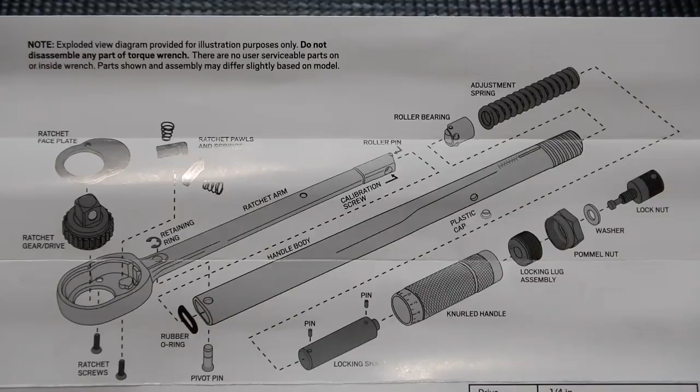This just shows the parts breakdown, how the unit is made for the large torque wrench. Now, these have no user serviceable parts, but this just shows how it's made, and I thought I would give that.

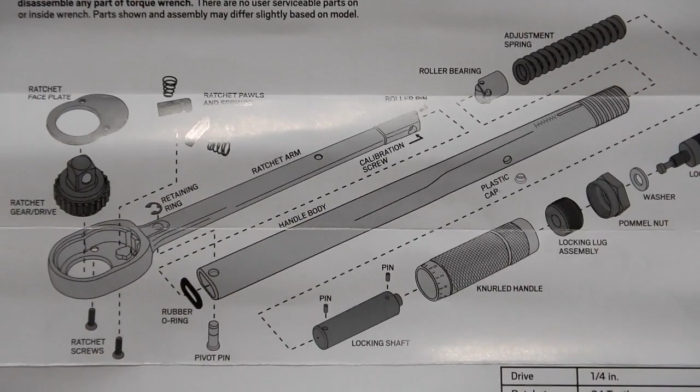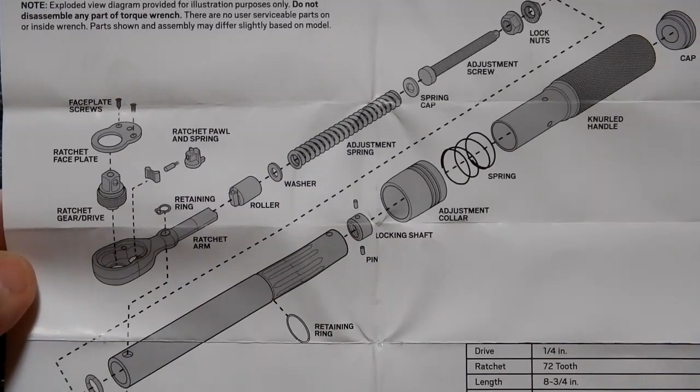And likewise, this is the smallest torque wrench.

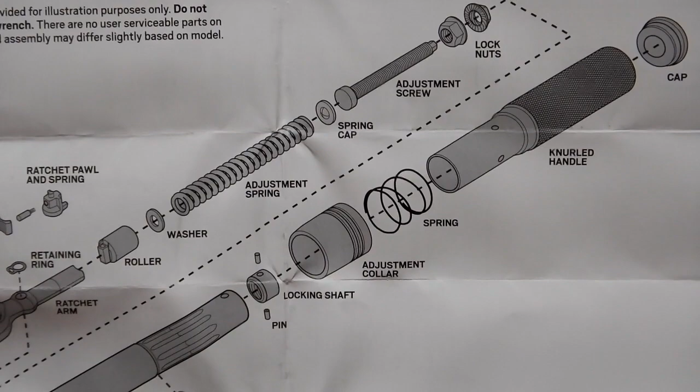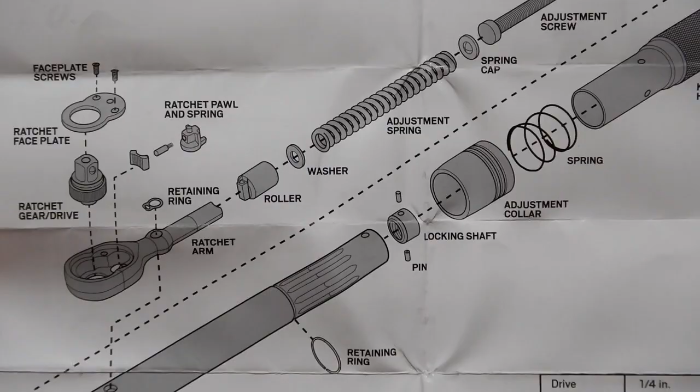With the tool, you do get this little tag that's attached to the square drive end. Thought I'd go over it real quick. Obviously, it is a precision tool. You never want to use one to break loose fasteners. I always use a separate wrench for that. These are strictly to just torque down to spec a bolt or nut.

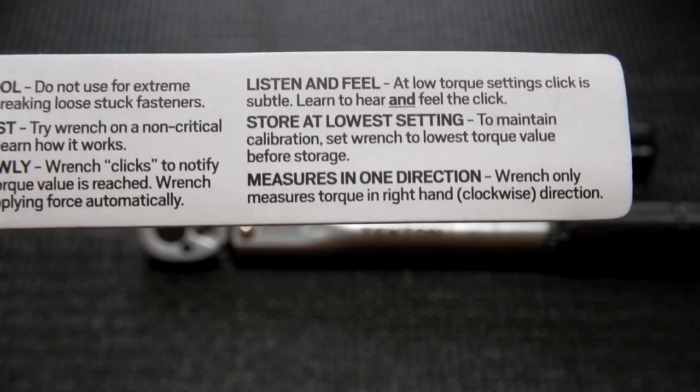And this says measures in one direction. Wrench only measures torque in right hand clockwise direction, which is true except for this, as I stated earlier, the smallest one will do clockwise or counterclockwise.

And again, if you're going to do a left-handed fastener with the small one that does go in the counterclockwise direction, if you've got to break it free for some reason, again, going in the clockwise direction, just use a separate wrench. Always use a torque wrench for tightening only. They're not breaker bars.

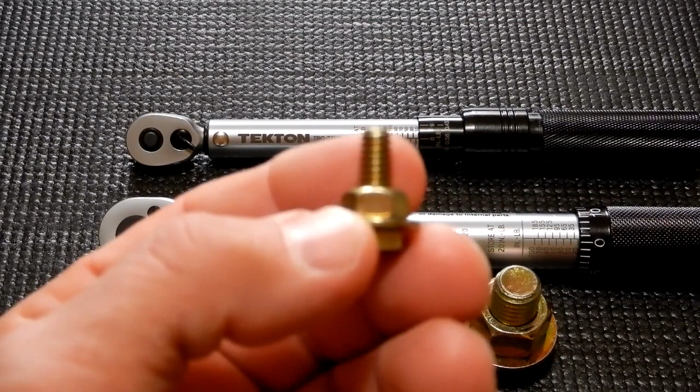Now, I stated that I have a little process that I use prior to actually torquing the bolt or nut that needs it. What I'll do, depending on the torque wrench and the size of the ultimate bolt or nut that I'm going to be using, I have these grade 8 bolts here. Like in this case with the 1/4 inch, when I do the demonstration, if I was going to use this on an engine or anything that had to be torqued, what I would do is I would put this in a vise. I'd put the head of the bolt in a vise.

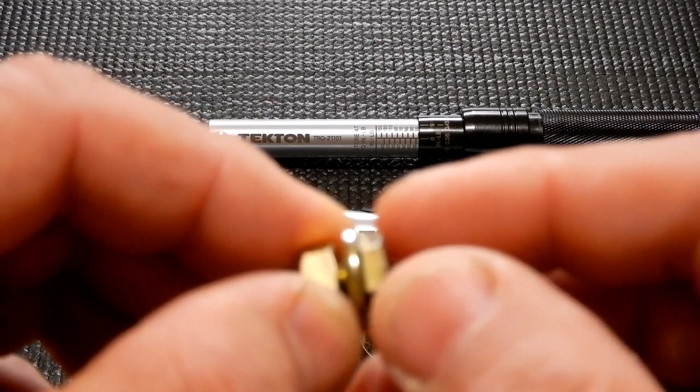I'd make sure that it was down just low enough so that it wasn't hitting the washer. It would be raised up enough so that it would have free range. The washer would not be hitting the vise jaw. I'd clamp it down in the vise, then I would take and start at the lowest setting of the torque wrench and just torque it a few times at that. Then I'd up it, depending on what the range is.

I'd torque it up, and then do it some more, going through the range and a little past the torque needed, doing that several times just to make sure the unit is exercised, I'll say. Because if it's been sitting a while and I don't use them that often, that's just something I do, and it's always worked out okay for me. That way you can ensure it's working properly, that you'll feel the breakaway or hear the click.

Okay, before I do a demonstration, let's take a look at the operation of each one of these.

The small Tekton uses a pushback collar to adjust the handle. I like it, but it's kind of a pain also, because to set this you've got to pull back and hold it. There's only a limited range in which you can do that, so you have to release it and keep doing it. Or just pull back and rotate the whole unit, as I'm doing here, until you get close to the desired setting, and then tweak it by turning it.

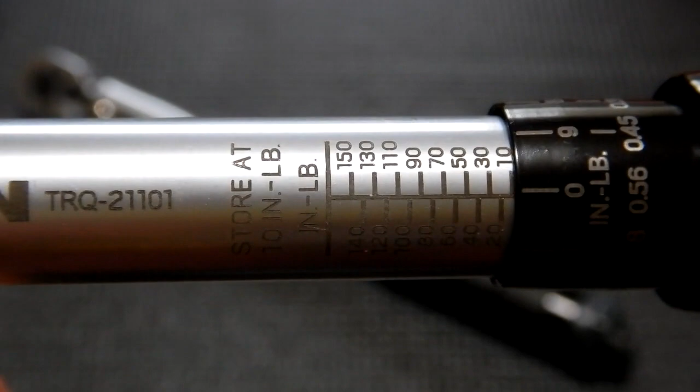Here you see it's set at the lowest setting. The scale is extremely easy to read. This is the inch-pound side. I didn't mention the Newton meter side or the spec on that earlier. I neglected to do that, but I just never use that myself.

And again, here's that collar that you pull back on. So let's say you were going to set this at, say, 32 inch-pounds. There's 30. Then just go to the 2, and that would be your 32 inch-pounds.

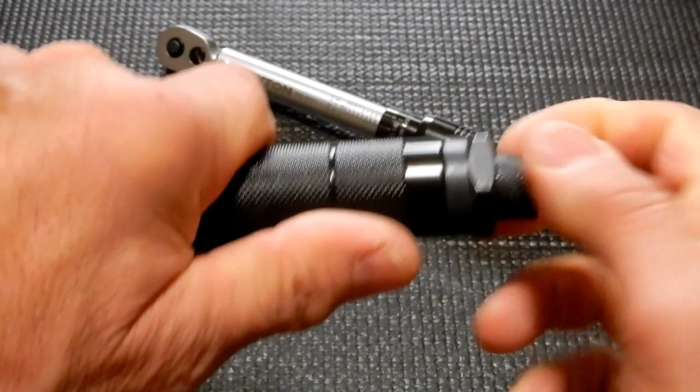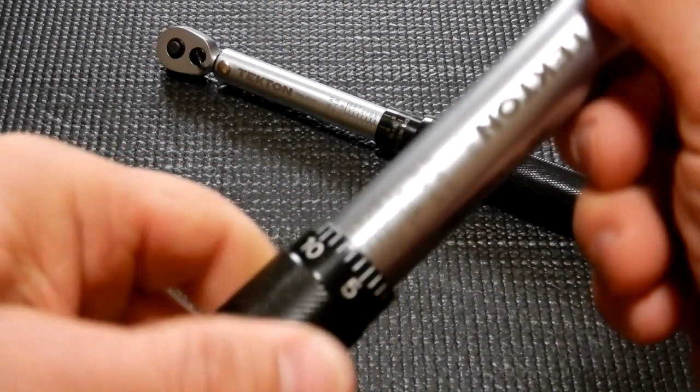Now, the larger torque wrench of the two is different in the way it locks and unlocks for the setting. Use the knob down here to loosen it. Now the handle is free to turn as much as you want, stopping wherever you want. And when you get to the torque setting you want, lock that down, and it locks the handle in place.

On the larger one, here you see the scale. It's set to the low setting right now, 20. It also has the Newton meters on the opposite side. Again, as with the other wrench, the scale is well engraved and easy to read. No issues there.

The only other thing I'd like to point out is that the small one does have a quick release head, which I really like. The large one doesn't.

Okay guys, we're going to do a demonstration of the torque wrenches, and here you see in the vise the quarter inch grade 8 bolt and nut that I'm going to use for the test. As I mentioned, every time I torque it, to remove it I'm going to use a regular wrench, a ratchet and socket. I will not use the torque wrench to break it free. I'm going to start the test out with the smallest Tekton,

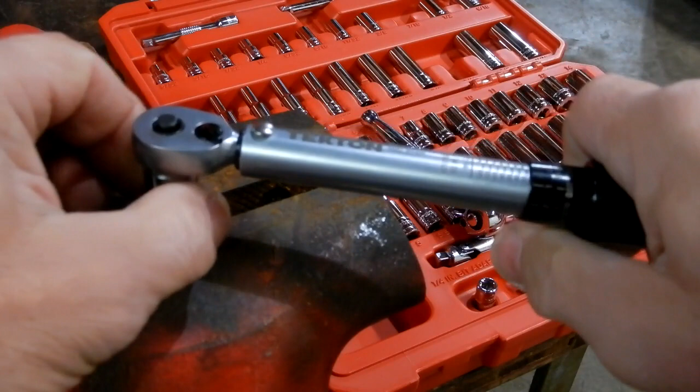the TRQ-21101, and I'm going to start out at the 10 inch-pound setting, the lowest setting. Right there, it broke free. We'll do that again. Right there. Just a little bit of spring. It was extremely easy to feel, but that's at 10 inch-pounds.

Right there. Next up, 30 inch-pounds. You may have heard that. I don't know if it came through on the camera, but you could easily see it break away. Right there. Let's do it one more time at 30 again.

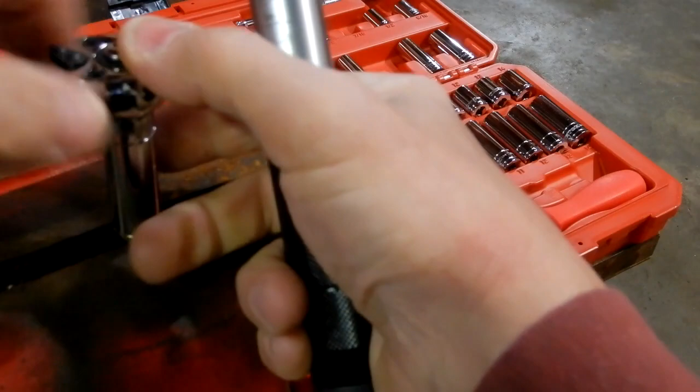Now right there, almost instantaneous, because it's got a longer leverage arm. The feel -- you've got to go real slow. Let's do that again. That's why you want to be slow and deliberate, so you can feel it. Can't be in a hurry, or you'll go right past where the torque setting should be. Right there.